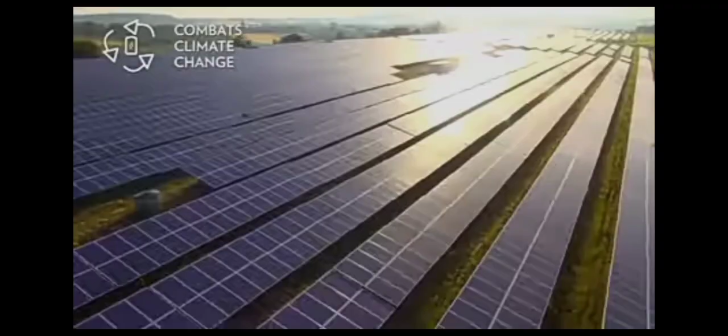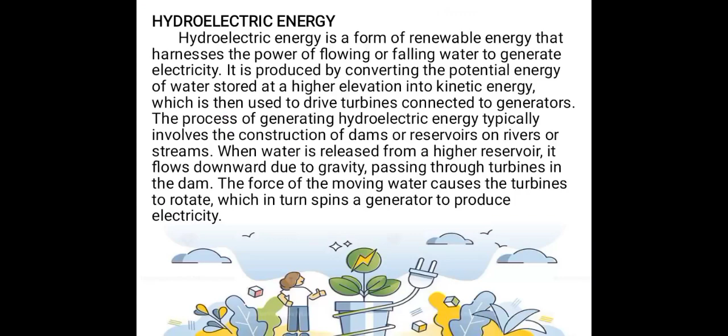Hydroelectric energy is a form of renewable energy that harnesses the power of flowing or falling water to generate electricity. It is produced by converting the potential energy of water stored at a higher elevation into kinetic energy, which is then used to drive turbines connected to generators. Let me show you a diagram. Let me show you a video to better understand how hydroelectric power energy is generated.

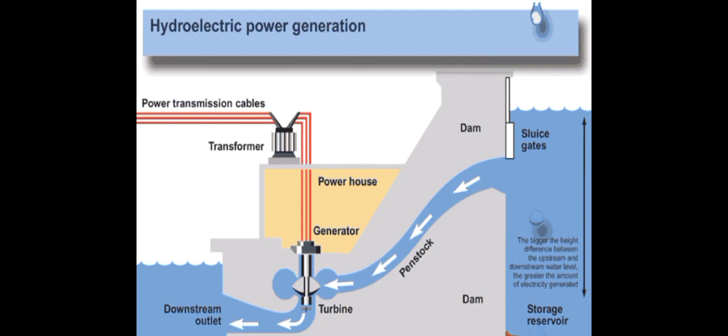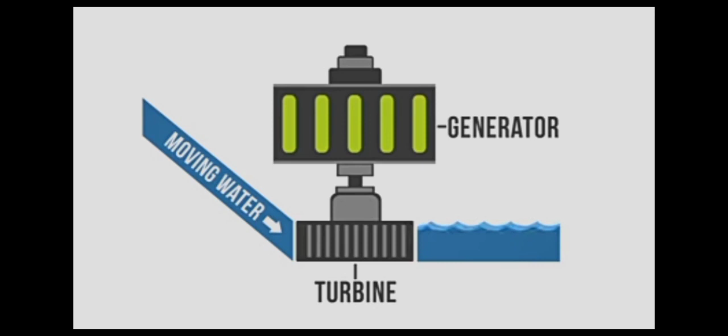Hydropower, or hydroelectricity, refers to the conversion of energy from flowing water into electricity. It is considered a renewable energy source because the water cycle is constantly renewed by the sun. One of the first uses of hydro energy was for mechanical milling, such as grinding grains. But today, modern hydro plants produce electricity using turbines and generators. The mechanical energy created by moving water spins rotors on a turbine. This turbine is connected to an electromagnetic generator which produces electricity when the turbine spins.

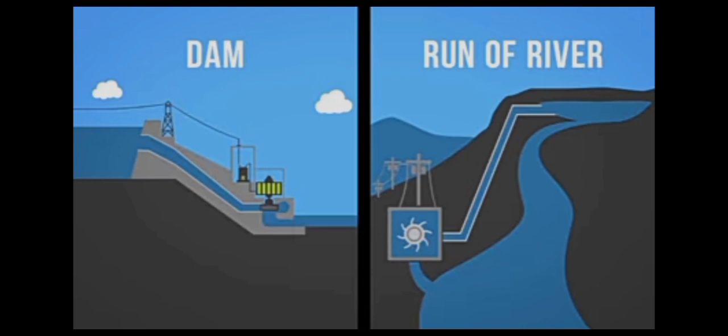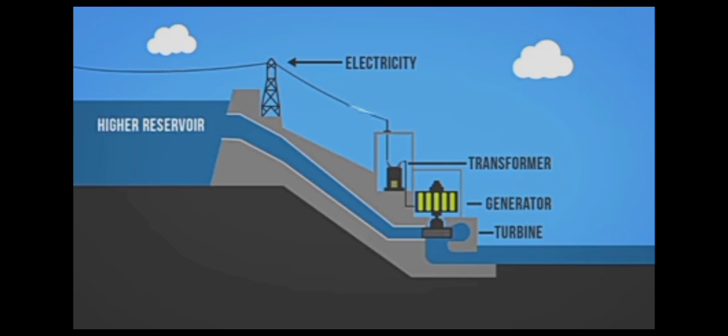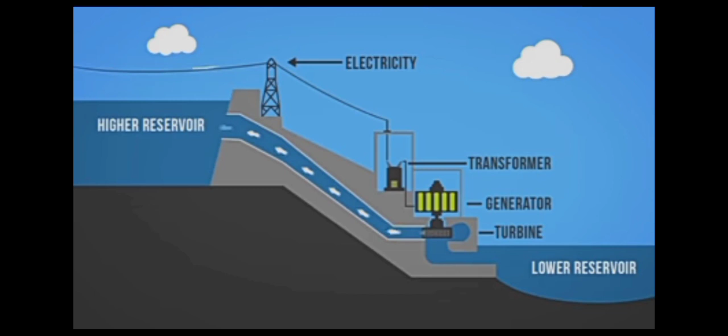There are two main types of hydroelectricity production: dams and run-of-river. Hydro dams utilize the potential energy from dammed water to produce electricity. A dam is a large barrier constructed to raise the level of water and control its flow. The elevation created by the dam creates gravitational force for turning the turbine when water is released. Some dams also contain an additional reservoir at their base where water is stored to be pumped to the higher reservoir for release when electricity is in demand. This is referred to as pumped storage hydro.

The second form of hydroelectricity production is run-of-river hydro. Run-of-river still uses turbines and generators, but relies on natural water flow rates of rivers, diverting just a portion of the water through turbines. Because run-of-river hydro is subject to natural water variability, it is more intermittent than dammed hydro.

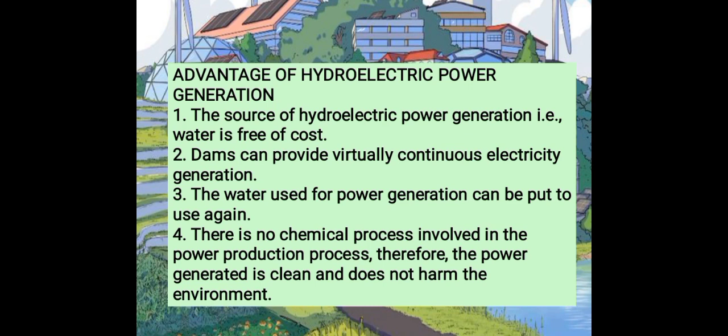Here are the advantages of hydroelectric power generation. The source of hydroelectric power generation, for example water, is free of cost. Dams can provide virtually continuous electricity generation. The water used for power generation can be put to use again. There is no chemical process involved in the power production process. Therefore, the power generated is clean and does not harm the environment.

Solar energy refers to the radiant light and heat emitted by the sun, which is harnessed and converted into usable energy through various technologies. It is a renewable and abundant source of energy that can be used to generate electricity, heat water, power vehicles, and provide lighting.

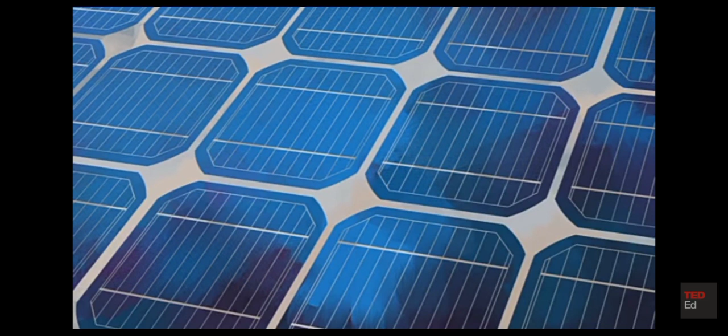The Earth intercepts a lot of solar power, 173,000 terawatts. That's 10,000 times more power than the planet's population uses. So is it possible that one day the world could be completely reliant on solar energy? To answer that question, we first need to examine how solar panels convert solar energy to electrical energy. Solar panels are made up of smaller units called solar cells. The most common solar cells are made from silicon, a semiconductor that is the second most abundant element on Earth.

In a solar cell, crystalline silicon is sandwiched between conductive layers. Each silicon atom is connected to its neighbors by 4 strong bonds, which keep the electrons in place so no current can flow. Here's the key. A silicon solar cell uses two different layers of silicon. An N-type silicon has extra electrons, and P-type silicon has extra spaces for electrons, called holes. Where the two types of silicon meet, electrons can wander across the p-n junction, leaving a positive charge on one side and creating negative charge on the other.

You can think of light as the flow of tiny particles called photons shooting out from the sun. When one of these photons strikes the silicon cell with enough energy, it can knock an electron from its bond, leaving a hole. The negatively charged electron and location of the positively charged hole are now free to move around. But because of the electric field at the p-n junction, they'll only go one way. The electron is drawn to the N side, while the hole is drawn to the P side.

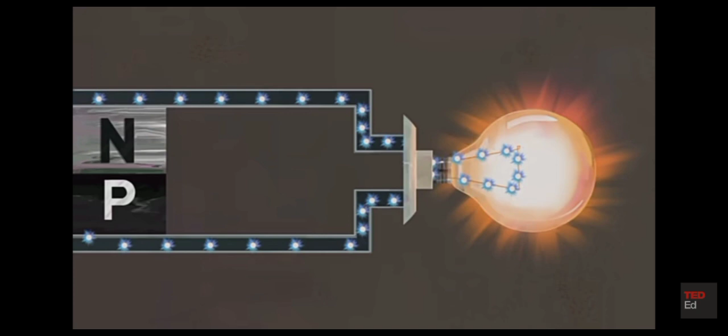The mobile electrons are collected by thin metal fingers at the top of the cell. From there, they flow through an external circuit, doing electrical work like powering a light bulb, before returning through the conductive aluminum sheet on the back. Each silicon cell only puts out half a volt, but you can string them together in modules to get more power. 12 photovoltaic cells are enough to charge a cell phone, while it takes many modules to power an entire house. Electrons are the only moving parts in a solar cell, and they all go back where they came from. There's nothing to get worn out or used up, so solar cells can last for decades.

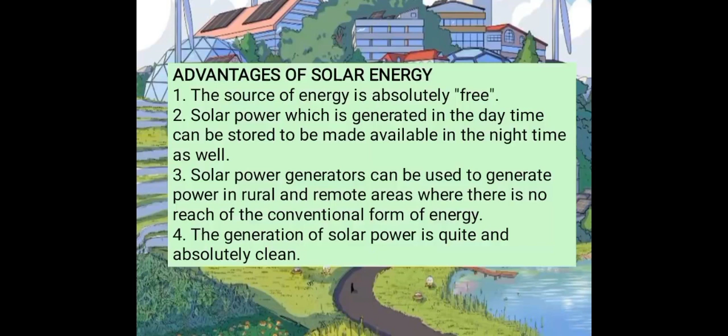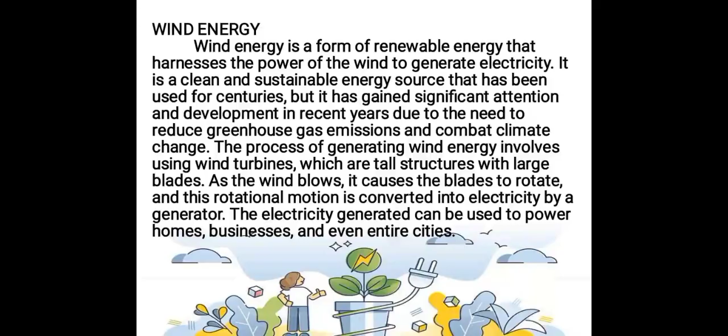Here are some advantages of solar energy. Now let's talk about wind energy. Wind energy is a form of renewable energy that harnesses the power of the wind to generate electricity. It is a clean and sustainable energy source that has been used for centuries, but it has gained significant attention and development in recent years due to the need to reduce greenhouse gas emissions and combat climate change. Here's a diagram to show how a wind turbine works.

Every 24 hours, wind generates enough kinetic energy to produce roughly 35 times more electricity than humanity uses each day. And unlike coal or oil, this resource is totally renewed each day.

So how can we harness this incredible amount of energy? And is it possible to create a world powered entirely by wind? The basic principle of wind energy is simple.

A series of sails or blades mounted around a rotor catch the wind and translate its kinetic energy into rotational energy. Traditional windmills use that rotational energy to grind wheat or pump water. But in modern wind turbines, it turns a generator that creates electricity.

This conversion from wind to rotational energy to electricity has defined wind turbines since their invention in the late 19th century. And there are three primary factors that determine just how much energy they can produce: the size and orientation of the blades, aerodynamic design, and the amount of wind turning the rotor.

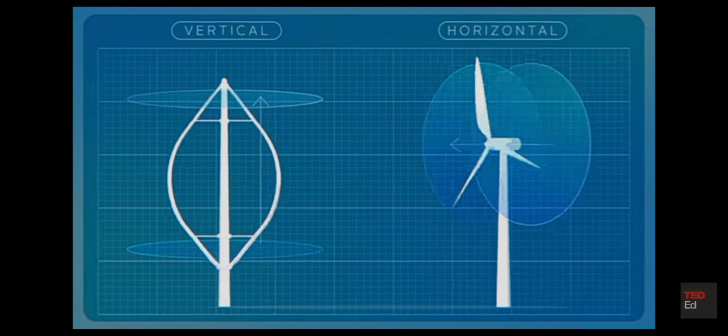First up, blade orientation. Wind turbines can be designed with their rotor on a vertical axis or a horizontal axis. Vertical blades can pick up wind coming from any direction, but with much less efficiency than horizontal axis rotors.

Horizontal designs allow blades to capture the wind's full force by tracking the wind's direction and turning to face it. This turning process is called yawing, and older windmills achieved it through manual monitoring. Today, wind sensors and computer systems automatically adjust the blades with expert precision to capture as much energy as possible.

Outside rotor orientation, the blades themselves need to be shaped to maximize efficiency. While early designs used flat blades, modern blades are curved like airplane wings. Wind travels faster over the curved surface, creating a low-pressure pocket above the blade that forces it upwards.

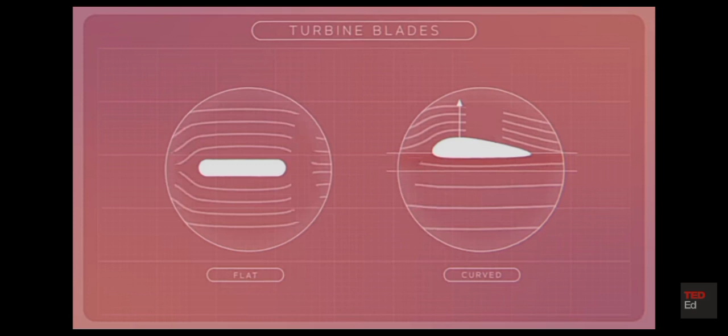Since the amount of lift depends on the angle at which the wind is moving relative to the blade, modern blades also incorporate a twist, optimizing how much of the blade can cut into the wind. Made of fiberglass and resin layers, these blades are strong enough to operate through rain, lightning, and blistering sunlight for over 20 years. Even with aerodynamic blades and a horizontal rotor, a wind turbine can only capture wind if it's

in a windy environment. Wind speeds typically increase the higher into the atmosphere you travel. So today, most turbines are well over 100 meters tall, with equally large rotor diameters. A turbine of this height and size can capture a huge amount of wind, generating enough electricity every year to

power 750 American homes. A wind farm of 200 similarly sized turbines could power over 150,000 American homes, or twice as many European homes, for an entire year.

Offshore wind farms contain an even greater number of even larger turbines. In 2019, the largest wind turbine ever built began operating off the coast of the Netherlands. With a rotor diameter of 220 meters, just one of these turbines can meet the annual power needs of 16,000 European households.

Advantages of wind energy: renewable and sustainable, clean and environmentally friendly, and low operating cost.

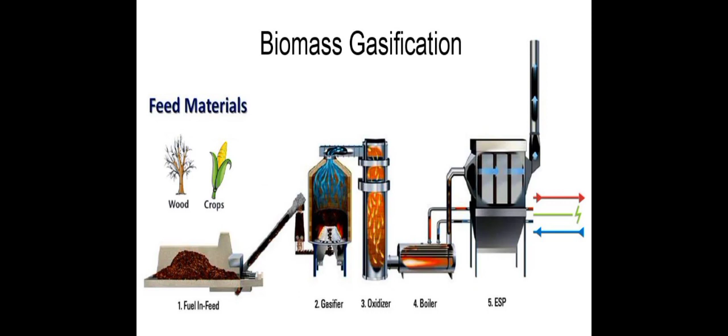Energy 101. Biomass, the original renewable energy. It's been part of our lives since our ancestors learned to control fire. In fact, it's made possible by the sun, whose energy is absorbed by trees and plants through photosynthesis, and then released when organic matter is burned or decomposes.

First, there's plant waste. Wood scraps, sawdust, and crop waste can be collected from farms or manufacturers. The waste is burned to heat water. The hot water creates steam. The pressure of the steam spins a turbine. The turbine powers a generator. The generator creates electricity. Simple, really.

Next up, animal waste, also known as the problem of cow poop. The solution? Waste from farm animals can be collected in a large tank called a digester, filled with bacteria that eats the waste and converts it to methane gas. The methane is captured and burned to heat water and create steam. Sound familiar? Second verse, same as the first.

This same principle can also be used to capture methane, a potent greenhouse gas with 25 times the heat-trapping ability of carbon dioxide, from landfills. Once a section of the landfill is closed off, pipes are run from the waste to collect the gas, which can then be burned to make electricity or heat.

Biomass may not be the prettiest form of renewable energy, and it needs to be used carefully and thoughtfully to protect ecosystems and prevent greenhouse gas emissions. But it can be a smart way to make use of waste. Power to the poop!

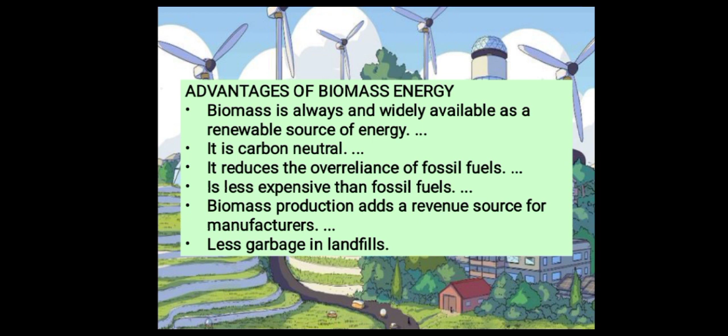Biomass advantages. Biomass is always and widely available as a renewable source of energy. It is carbon neutral. It reduces the over-reliance on fossil fuels. It's less expensive than fossil fuels. Biomass production adds a revenue source for manufacturers and less garbage in landfills.